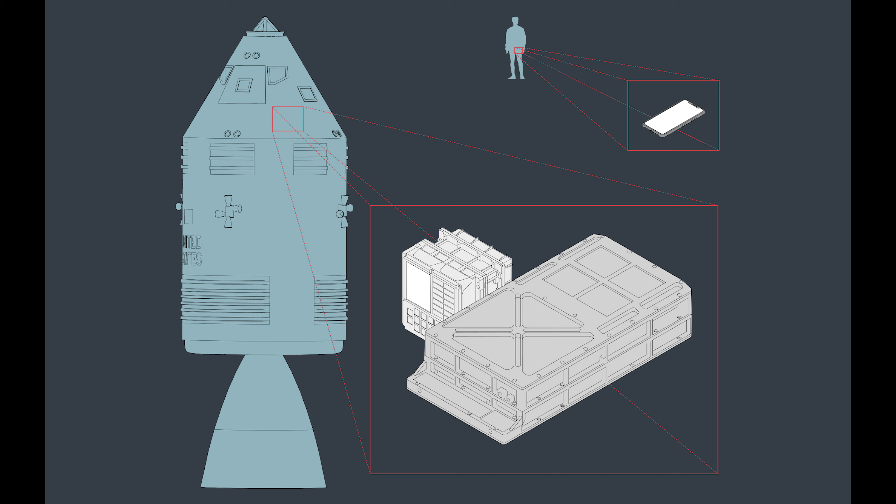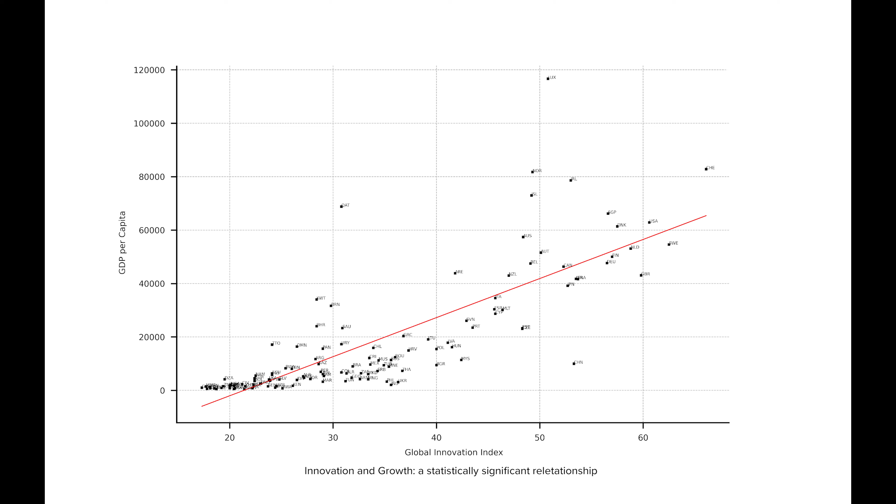Over the last half a century, we have made great leaps forward in information technology, and yet we seem to stand still in other sectors of the economy. The smartphone in your pocket is over 100,000 times more powerful than the computer that landed humans on the moon. Such innovation drives growth through productivity gains and leads to higher wages and better living standards.

However, this technological progress has not lived up to its transformative potential. Firstly, the returns from innovation are not equally distributed. Cambridge, the home of ARM and the UK's biotech capital, also ranks as its most unequal city. Secondly, despite the IT advancements, average productivity levels have been stagnating, and so have incomes. Thirdly, although consumers now enjoy cheaper software and electronics, we're stuck paying higher prices for almost every other category of good.

I believe all three have the same root cause. We have failed to translate technological innovation into progress in industry.

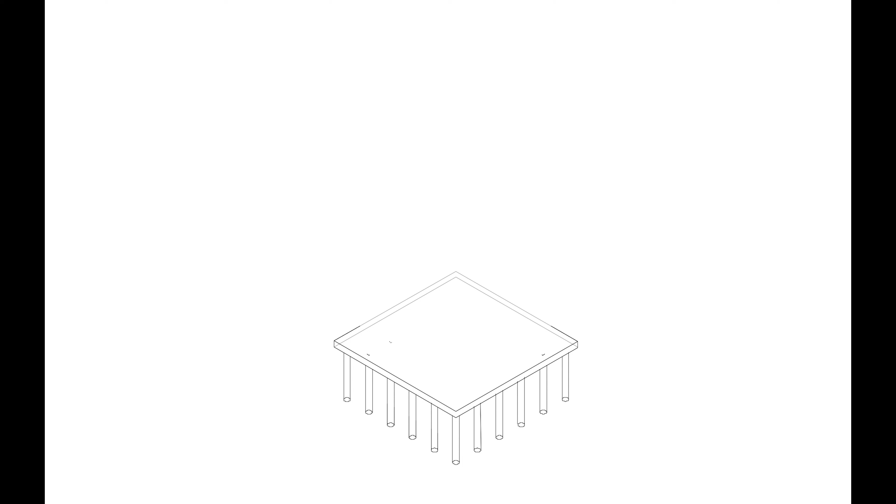Nowhere is this gap more apparent than in the construction industry, where a lack of innovation has resulted in construction that is slow, expensive, polluting, and unsafe. Our buildings have gotten increasingly more complex. They now accommodate a whole series of structural and mechanical systems, and yet the way we build them has remained fundamentally unchanged.

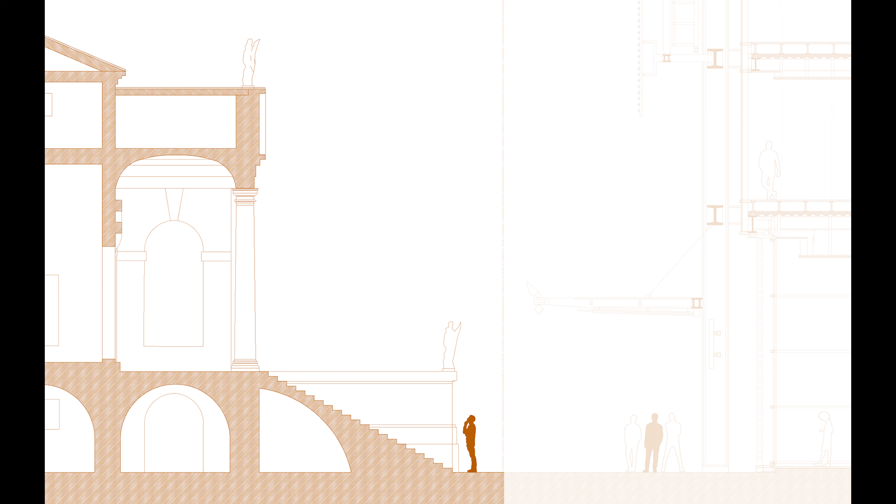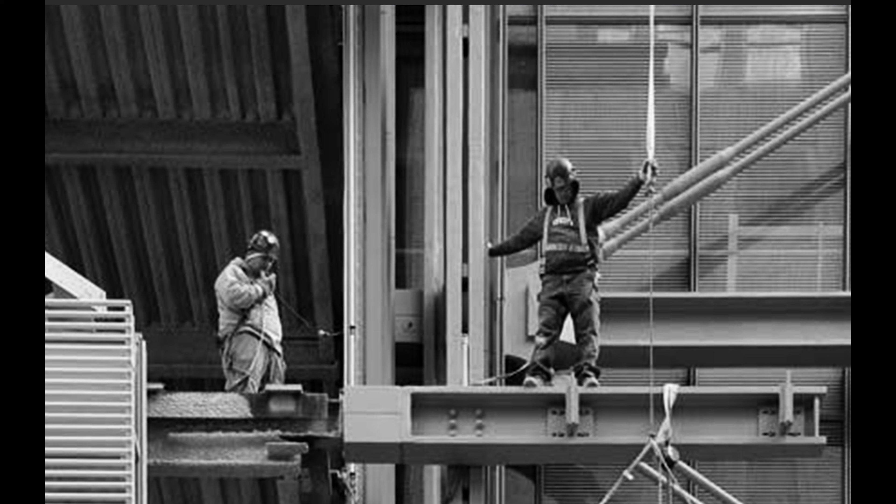This becomes abundantly clear when we compare two buildings 500 years apart. Palladio's Rotonda has a monolithic, sculptural quality as a result of its brick and stone construction. Piano's New York Times building is much less sculptural, more an assembly of glass and steel. The two could not be further apart, and yet both were built with manual labor working on site.

I believe it is this failure to adapt how we build to what we're building that is the root cause of the industry's inability to build fast, to do so cost effectively, and to shrink its ecological footprint.

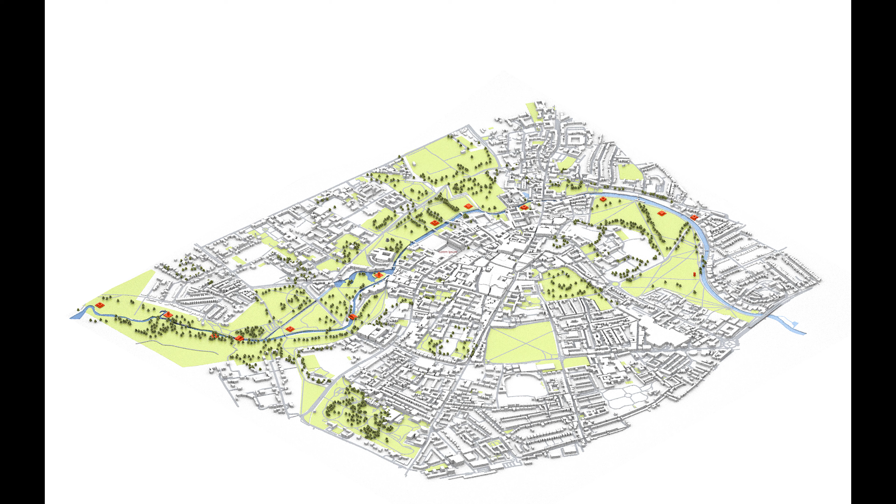I propose to leverage the concentration of talent, capital, and technological know-how found in Cambridge to stage a competition that will jumpstart innovation in the construction sector. For the next decade, advances in materials, assembly, and fabrication will be tested through the design and construction of a series of experimental buildings along the River Cam.

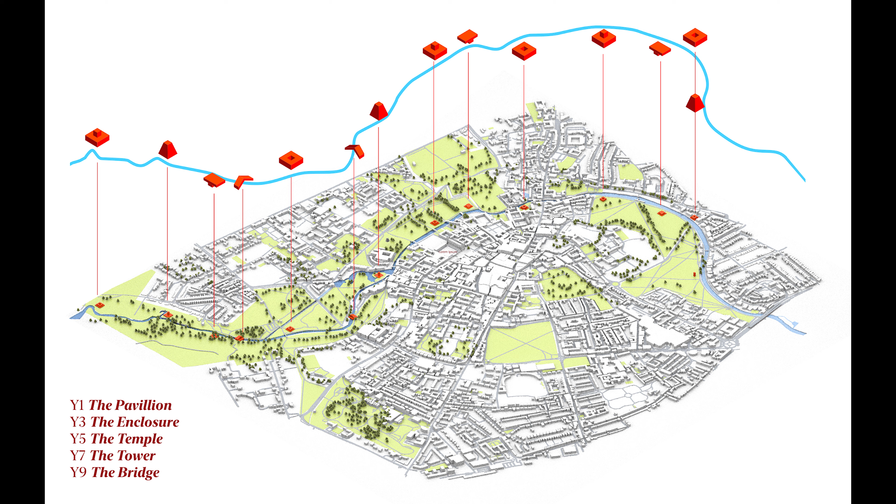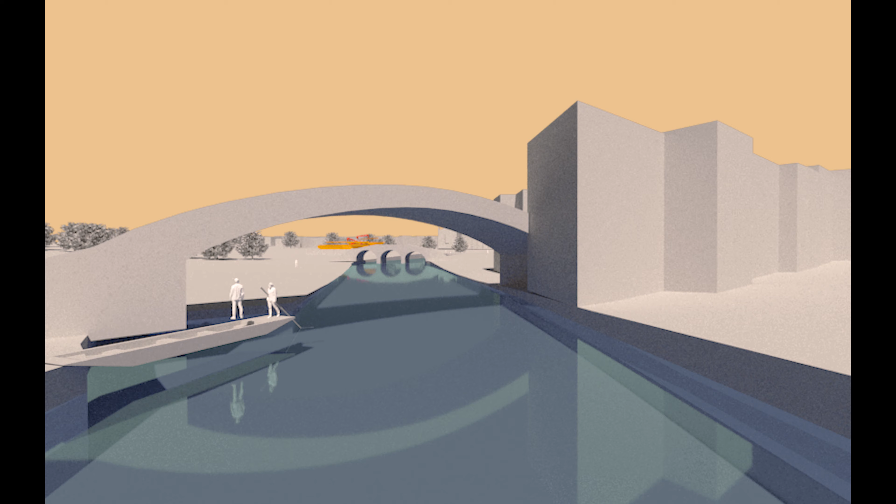The goal will be to develop scalable construction techniques that can outperform traditional methods in speed, cost, and emissions. Together, the projects will form a dynamic exhibit of the state of innovation. As such, the competition aims to reignite the public's imagination for and confidence in the transformative potential of technological progress.

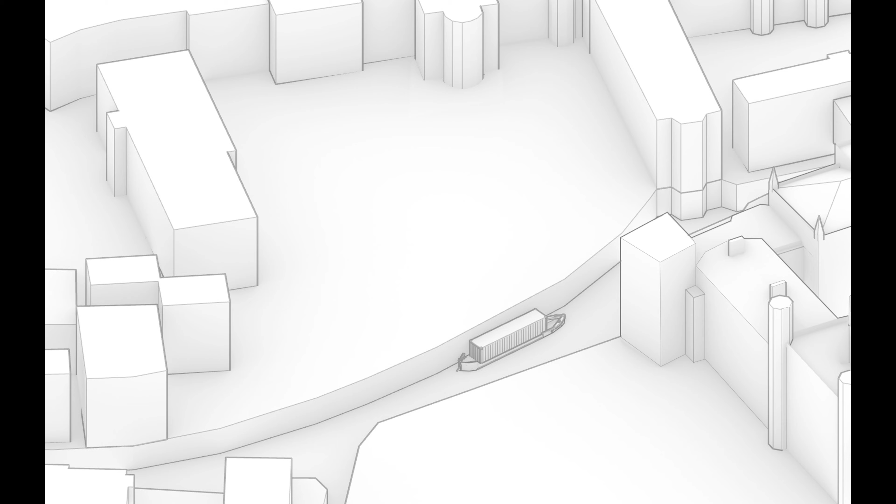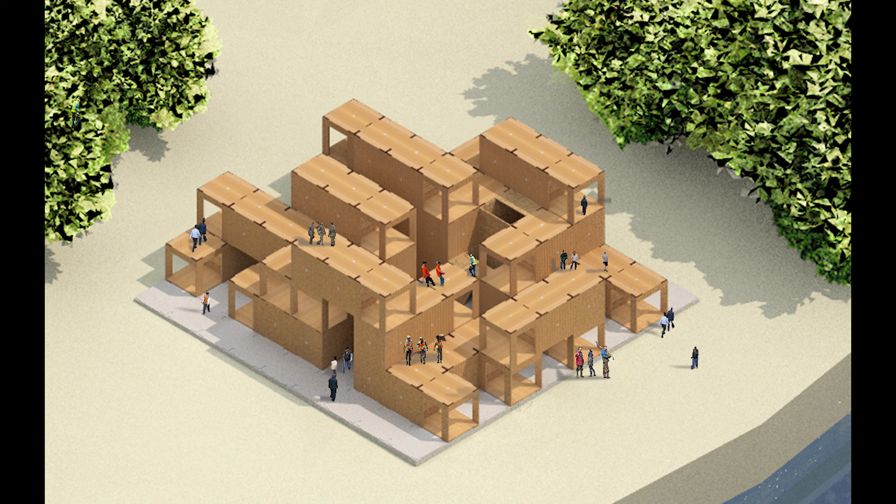I speculate that three competing visions will emerge as a result. The first will aim to use existing prefabrication technology to generate building elements that can be deployed in highly flexible ways. Here, a homeless shelter is built from a single habitation module. This cuts costs and time through standardization, but still allows for the creation of unique spaces via the interlocking geometry of the modules.

The second will aim to bring the assembly line to the site in order to reap the benefits of speed and safety without trading off on the ability to build bespoke solutions. By leveraging advances in robotics, this timber observation tower rises from the ground in under a day.

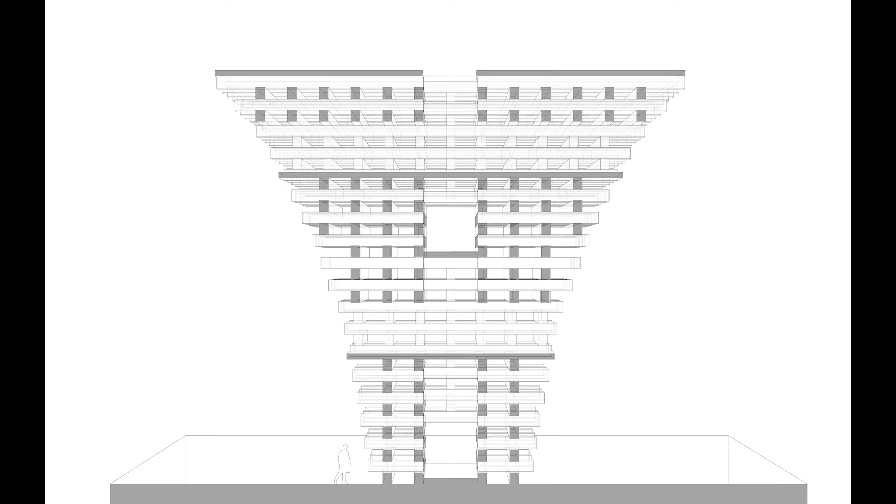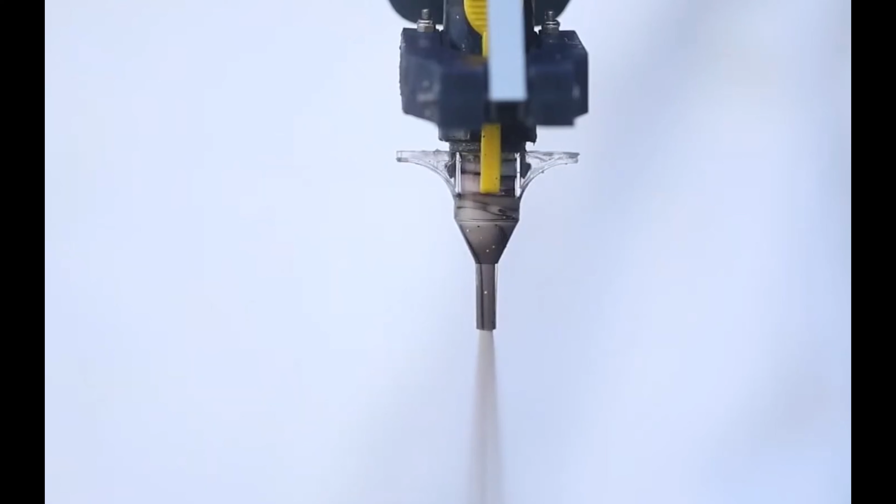The third will aim to rethink the way we build altogether by taking cues from nature. Rather than assembling the building out of discrete parts, the vision will be to print it from a single material, a polymer the properties of which can be changed at the point of application. A material that has the potential to be stiff and structural in one configuration, porous and insulating in another, light and transparent in yet another. As such, this has the potential to change the way we think about buildings altogether.

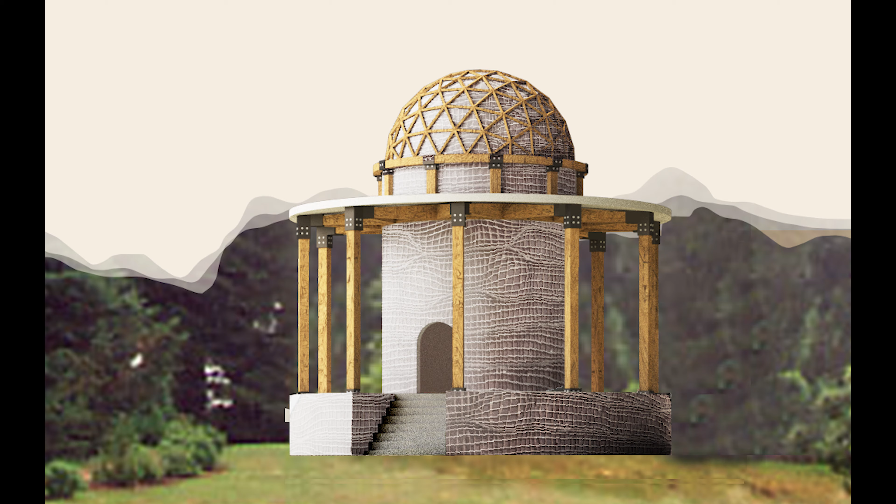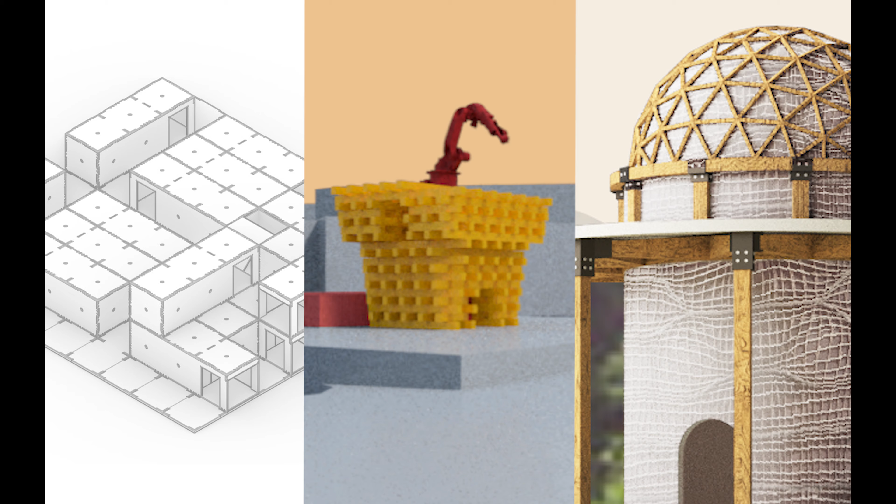I speculate that the first implementation of such a technology will attempt to grow the skin of a building on top of a conventional frame structure. As a result of 10 years of such an experiment, we hope to breed out technologies that are ready for the mass market.

The goal is to develop the tools we need to build our future.